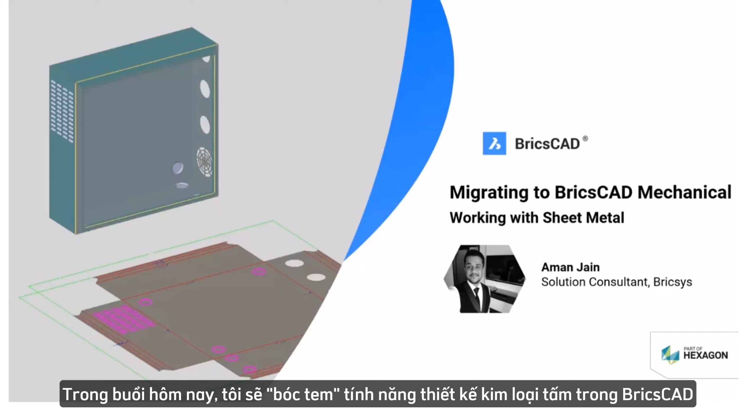In this session, we will unveil sheet metal design in BricsCAD and how we can easily migrate to BricsCAD Mechanical from a traditional 3D MCAD tool. From concept to fabrication, we will also try to discover BricsCAD's tools and the workflows that could essentially speed up your entire sheet metal design tasks. So sit back, relax, and enjoy this deep dive session with me on BricsCAD.

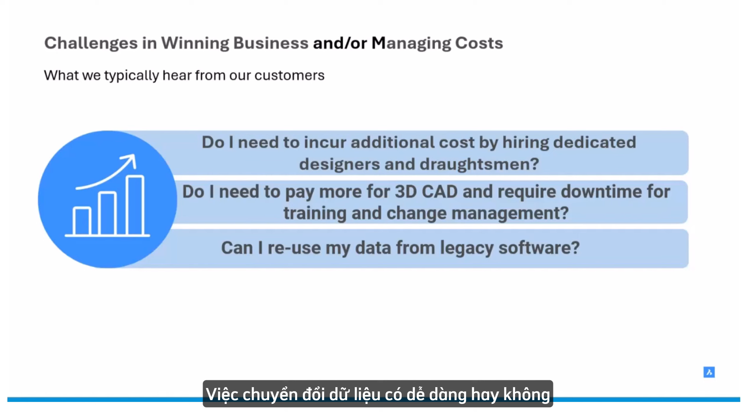Both of these processes require a company to invest in terms of both time and cost, which at times could be a costlier affair if the implementation does not go the way it was intended to. This transition period could also lead to temporary productivity losses as the workforce adapts to new tools and processes. Another concern that bothers most of them is the compatibility between their existing CAD and the new tool sets that they are trying to adopt. How easy it is to migrate is one of the questions that's asked by many of these organizations.

With BricsCAD offering everything in native DWG format, we aim to solve these challenges by providing industries a single platform for all their 2D and 3D workflows with a similar interface, all at an extremely robust cost. So yes, a software is capable enough to do a lot of things, but the real question is, do you really need it? A typical CAD workflow is what we see on the current slide.

We start with the component design. These components are then used to create assemblies, which is at the heart of any CAD workflow. The assembly may require you to model certain parts using surfaces or sheet metal. And once the sheet metal design and the assemblies are ready, we go to the production drawings. Presentation and animation, if not mandatory, remain an essential part for us to be able to create our design technical manuals and so on.

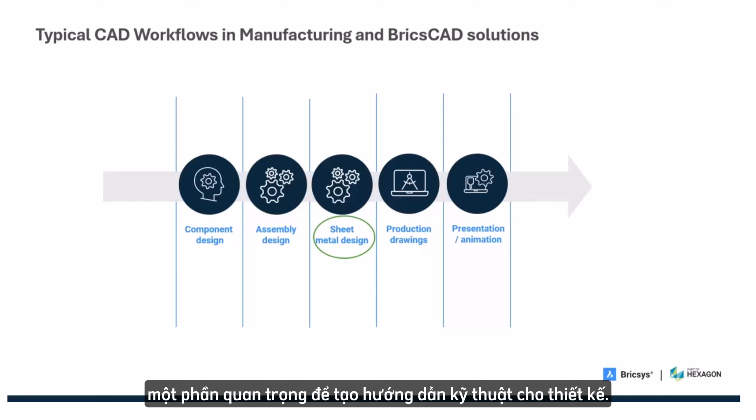Now, this entire workflow is very robustly supported by the BricsCAD Mechanical solution we have as an offering. And today in particular, we'll be looking at the sheet metal design module and how it helps users to improve, or rather collaborate or coexist with, their existing CAD solutions that they may be using.

This slide illustrates the computer-aided sheet metal fabrication workflow and highlights how BricsCAD is integrated within this workflow. The process is divided into several key phases, that is CAD for manufacturing, quoting, planning, programming, and production. BricsCAD plays a very vital role in the preparation and the production stages.

BricsCAD can be used to create and document the as-designed or the nominal geometry of the sheet metal parts. This involves creating detailed CAD models and ensuring that all components are correctly assembled according to the design specifications. Within BricsCAD, the bend and unfold operations are validated to ensure that the designed parts can be manufactured accordingly. This step is essential for confirming that the parts will behave as expected during the bending and the unfolding processes.

And then once the geometry is validated, it feeds into the quoting phase, where the validated geometry is used to calculate the cost, create quotations, negotiate price with the customers, and so on. The validated data from BricsCAD could also be critical for the planning phase, feeding into capacity planning, material planning, and scheduling. This ensures that the correct bill of materials and work are accounted for and that the project is scheduled effectively.

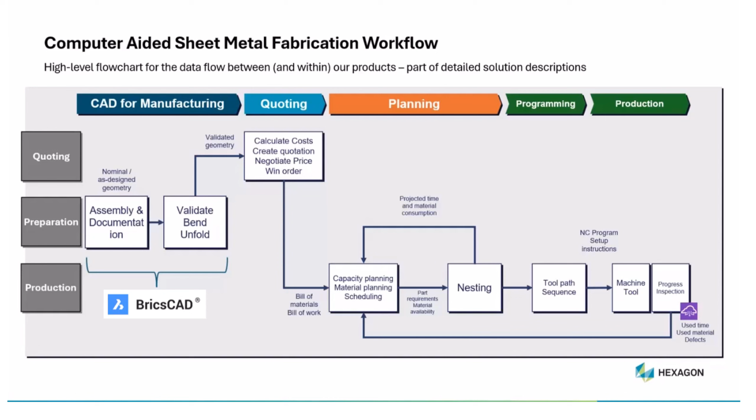Subsequently, this information can also be used for the nesting processes where parts are optimized for material usage. This feeds into the programming phase where the tool paths are sequenced for manufacturing. Finally, the production phase involves the machine tool execution of the NC programs generated earlier, with ongoing progress inspection. The feedback loop ensures that any such issues, defects, used time, and material are recorded and managed, optimizing the overall

manufacturing process. In summary, BricsCAD is quite integral at the early stages of the sheet metal fabrication workflow, particularly in preparing and validating the design geometry, which ensures accuracy and efficiency throughout the subsequent manufacturing stages.

The next slide showcases some of the key sheet metal modeling features that are available in the traditional 3D MCAD tools. So we start off with something called base flanges, which forms the base of the geometry of the entire sheet metal body that we are going to start with.

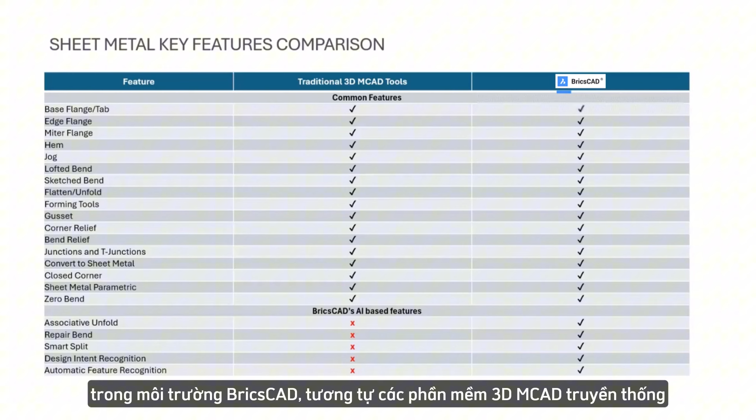Then comes the edge flanges, miter flanges, the reliefs that we have, the forming tools, flattening process, bends, junctions, T-junctions, converting an existing solid to a sheet metal body, sheet metal parametrics, and also some specific features such as closed corners and zero bends. With these features, a user can completely model their sheet metal bodies within the BricsCAD environment as compared against the traditional 3D MCAD tools.

So just to say, all these features that we see on the left-hand side are all available in the BricsCAD mechanical solution. And then, of course, since BricsCAD is known for its AI-based features, we do have AI-based features in the sheet metal module of the mechanical software.

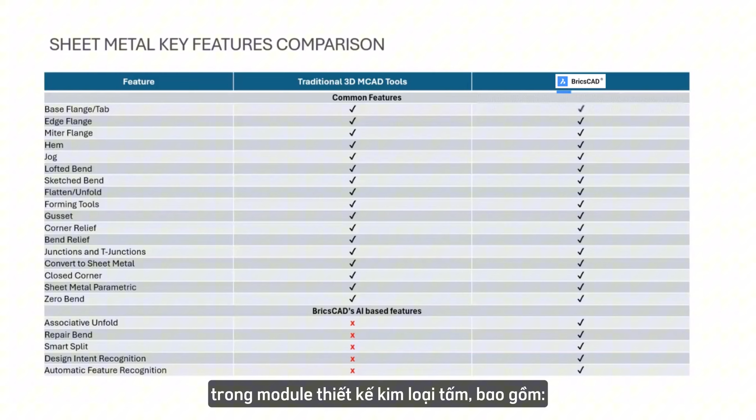There's something called associative unfolding, repair bends, smart split propagates, design intent recognition, and also automatic feature recognition, which are all available within BricsCAD. We'll have a look at some of these features in the demonstration that we'll be having after these slides.

So here we start with the demonstration now. And we'll start with BricsCAD V24, which is the latest version of the software. I'm using the ultimate version of the software, and hence I get access to all the modules present within BricsCAD. It's probably the only software in the world today that allows us to do BIM modeling as well as mechanical modeling within the same environment. Hence, integration and collaboration becomes very smooth.

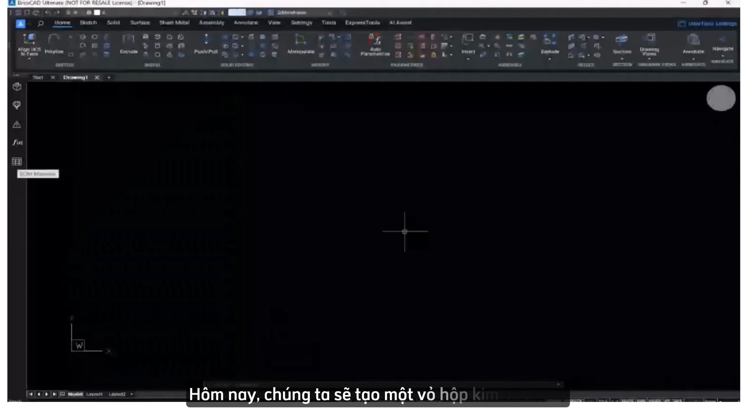Now with this, we start off with a new drawing. And today we'll be making a sheet metal enclosure. So for that, we'll have two processes that I'll show within the demonstration today. One is where we create the sheet metal from scratch within the BricsCAD environment. Another is where a sheet metal body would already be available to us, and how we can bring it inside BricsCAD to be able to convert it and use it further inside this environment.

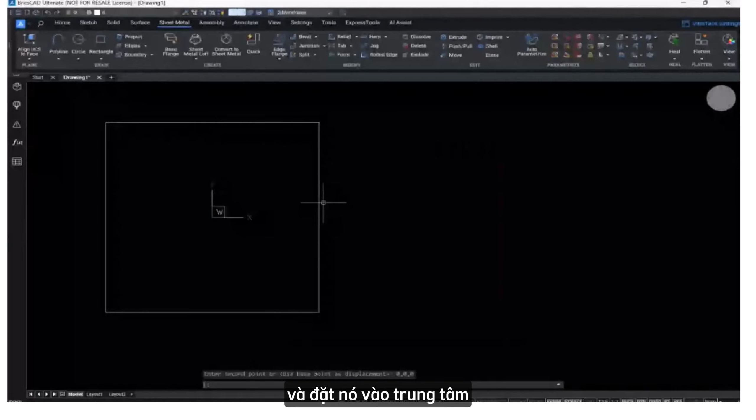So here I'm using the 2D drafting tools of BricsCAD, just creating a plain rectangle, or square rather, because it's 700 by 700 in dimensions. And I'm just trying to place it at the center. Since BricsCAD does not involve creation of plane geometries at all, it does not really matter on which plane we are trying to create our geometries from.

So the initial design intent, which we need to keep in mind for our traditional MCAD tools, is not something we need to do in BricsCAD. We can simply start with any of the planes that we'd want to work in. And as simple as this, we are able to create this base flange. So if you see, I just use the base flange command to create a flange out of the rectangle or the square that we had created.

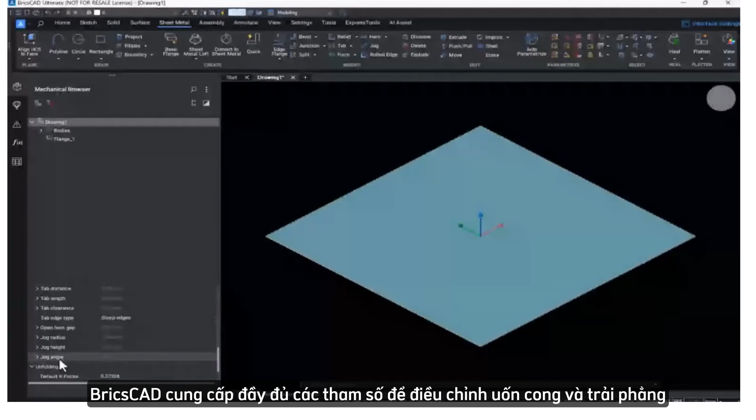And we have all those parameters that we can work with regarding folding and unfolding of the sheet metal body that we have in place, including K factors, bend reliefs, bend radiuses, and so on.

The next part would be creation of the edge flanges. And this time around, we'll select the edges in a very smart way. This is one of the smartest ways of selecting all the edges across instead of selecting them manually. And we'll select create edge flange from outside. There are two possibilities of creating an edge flange: one is from outside and one is within the flange itself, I mean, bending it internally, depending upon the type of bending process that we'll be following during our fabrication stage.

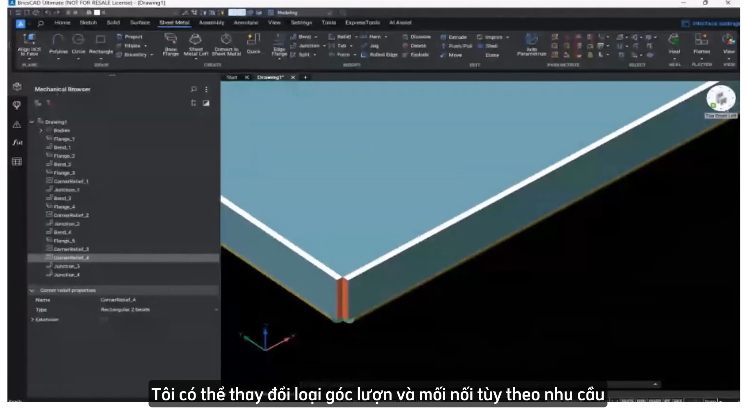And as you can see, within a fraction of a second, we were able to create these flanges, but also the corner reliefs and the junctions are automatically created as well. These corner reliefs we can change or modify depending upon the type of corner relief that we would want to use for our body. Of course, even in terms of the junctions, we can change the type of junctions, the junction mating that we'll have at the end of this modeling process.

So we'll try to create one more flange body. Now this is actually the door of the sheet metal enclosure that we are trying to model. And hence we'll be creating one more outside flange with a distance of 10 mm and 90-degree bend angle.

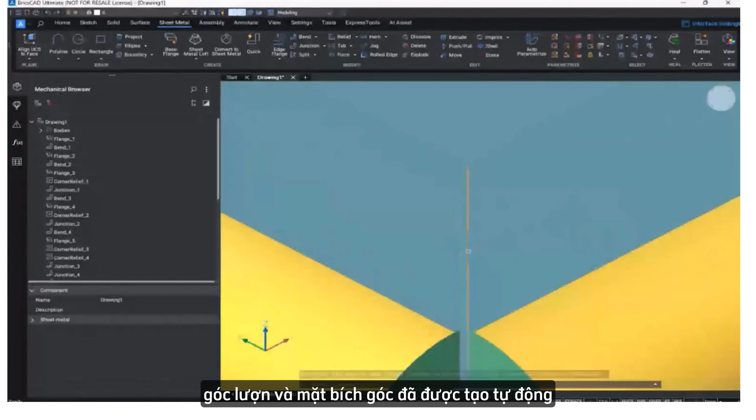Now with this, if we see in the left-hand side, the corner reliefs and the miter reliefs have automatically been created. At the same time, if I want to change the type of the bend relief that I'm getting over here, because essentially for a sheet metal enclosure, we need to make sure it's as packed as possible so as to avoid leakages of any kind.

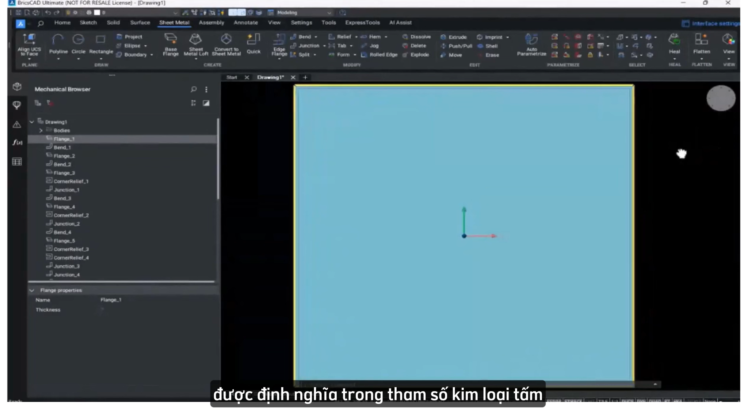So let's say if I select all these bend reliefs and from rectangle we make it smooth, we see the gaps have been closed to a minimalistic value. And of course, these values could be changed at a later stage as well. This is currently using the global value that had been defined along with the sheet metal parameters when we created the base. But this could be an absolute value, and we can change those values manually as well.

So the next part would be creation of vents and some keyholes for us to be able to place the switches. So since this will act like a control panel, we'll be having our red light switches as well as the green light switches and the lock for the door to open, as well as the vents for the air to circulate.

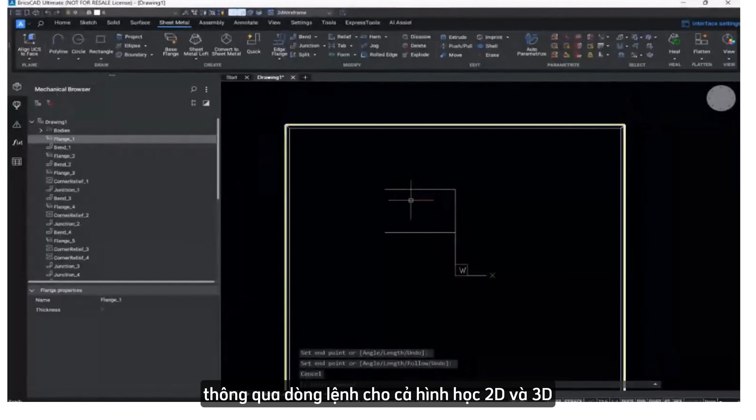Now, as you can see, the wonderful part about BricsCAD is it doesn't differentiate between the 2D environment and the 3D environment. I can use simple BricsCAD commands through a command line, even for my 2D geometries and the 3D geometries that I create. There's a 3D library and a 2D library that comes along with the installation. And here I'm taking a hole. This is actually a 3D parametric hole that's available within the library. And I'm just placing it, snapping it on the top of lines that I've just created.

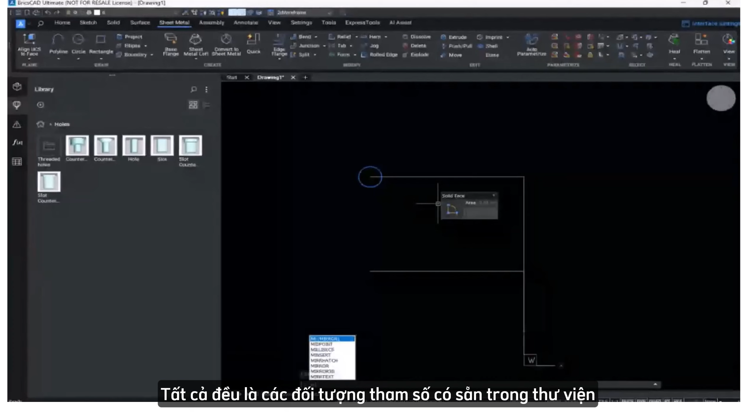And very simply, I can then mirror these, just change the diameter as per the diameter of the switches that I'm going to insert. As I said, these are all parametric features that are available within the libraries that you get. And of course, we can create our own custom libraries as well. We can simply add the components and have our own custom library created too. So here I'm just mirroring this particular hole that we have created.

And I'll just mirror those two holes as well. So we have about 4 switches. So we'll mirror this again based on the horizontal line that we have. So let us mirror the 2 holes that we have created. Select this one as well, and use the center line as a mirror line for us to be able to create this one.

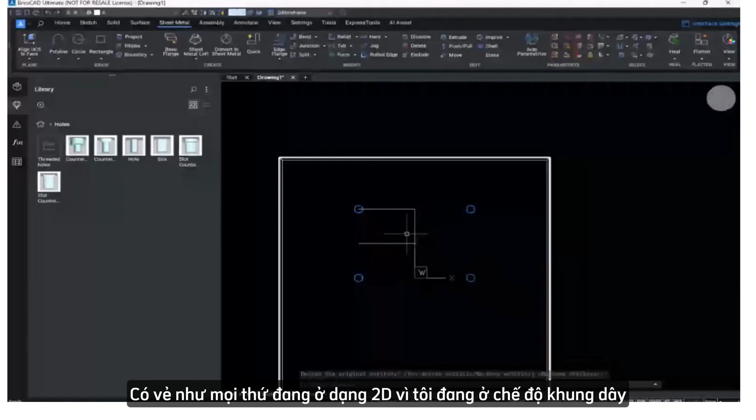Now you may feel that this is all in 2D because we are in the 2D wireframe representation, but this essentially is in 3D, and when we change the representation to a modeling perspective or any other perspective that shows us a 3D model, we'll actually be able to see that these are all actual holes, right? So here I'm going to add one more hole, which is for the lock, where the lock would be placed.

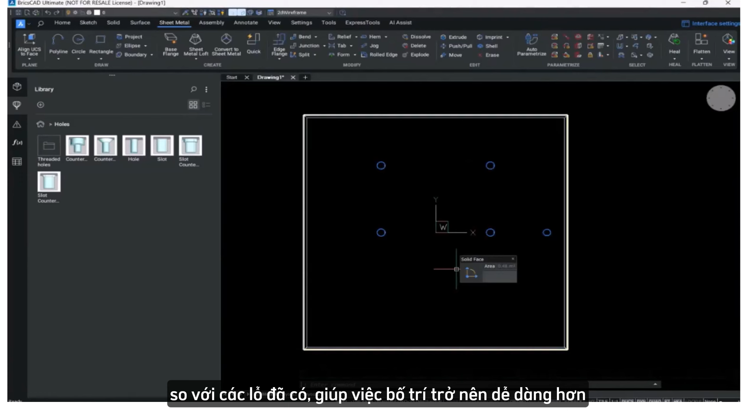Let's say this would be at a distance of around 140. Now, this is smart placement of the holes as well. So ideally, I'm able to place this in conjunction with the holes that I had already created, and I can add distances based on their positions. So this becomes easier for me rather than creating sketch geometries for each and every feature that we add, right?

Now, this is a slot. Not sure if you are able to see the slot representation because it's in red. So we'll rotate the slot by 90 degrees, and let's say from the horizontal flange it's at a distance of 100, and from this, it's at a distance of 50. And we'll then array it so that we get multiple instances of these slots. Now, these slots would act like vents for our enclosure.

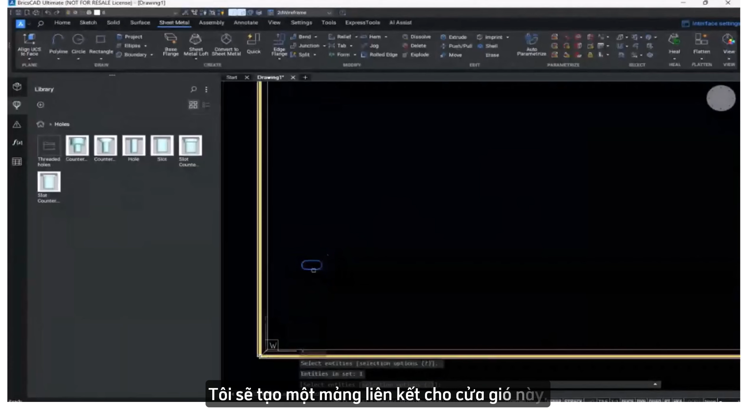That's the door. We just select this and have an associative array created for this particular slot that we have, right? Simply adding the numbers. So let's say for the columns, we have 20 numbers and the distance is 31.5. And then the rows, number of rows, we can increase to 4 or 5 depending upon the designs that you have in place. So for this one, I'm just increasing it to 4, keeping the distances between the slots the same. Just hit enter, and that's there.

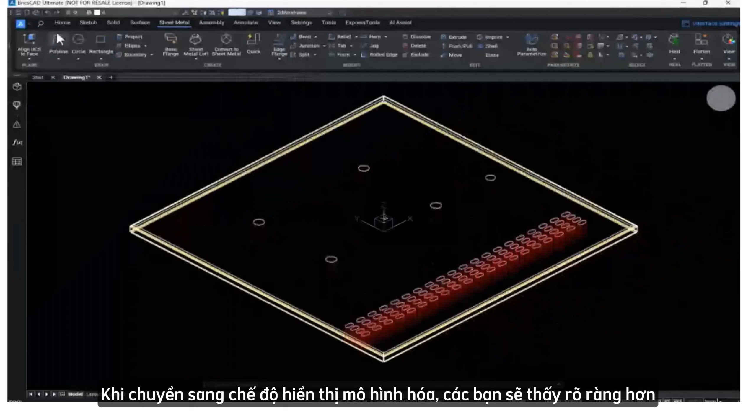So I have my holes placed, I have the slots placed as well. And when I switch the perspective to 3D, we see that these are actually hole representations and slot representations onto the sheet metal body. And when I switch off this layer, it's actually subtracted the material out of our base flange. BricsCAD is able to recognize these features as sheet metal features in general. And I just save this file before we move on to the next step.

So this, as I said, is the door DWG. Everything in BricsCAD is DWG, right? So that is kind of the USP of the solution offerings that we have. Let's say if I want to make it backwards compatible, share it with someone who's not using BricsCAD V24, I can do that. You cannot do that with any other traditional MCAD tool because they have their own proprietary extensions.

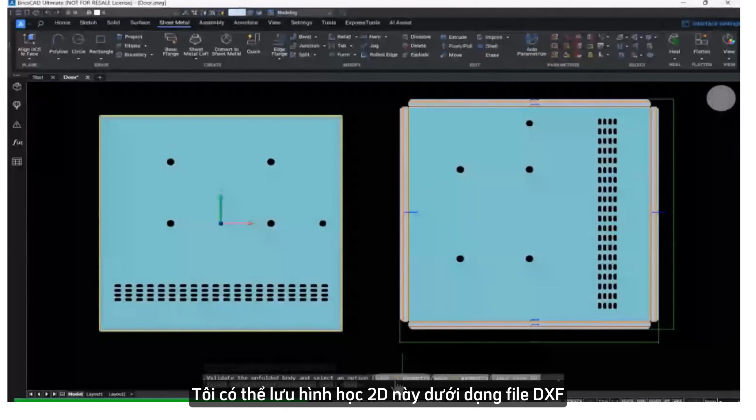So here's the unfolding pattern of the geometry that we created. And I can save this 2D geometry as a DXF file. So it's kind of a one-click DXF. As we looked in the process where we need an input from the CAD software to the machining software, this is the one that's most widely used. This can be used in most of the CAM softwares worldwide, and then the machining codes could be generated on top of this. As you can see, the bend lines, the representations, the reliefs have automatically been created for the DXFs. Let's save this.

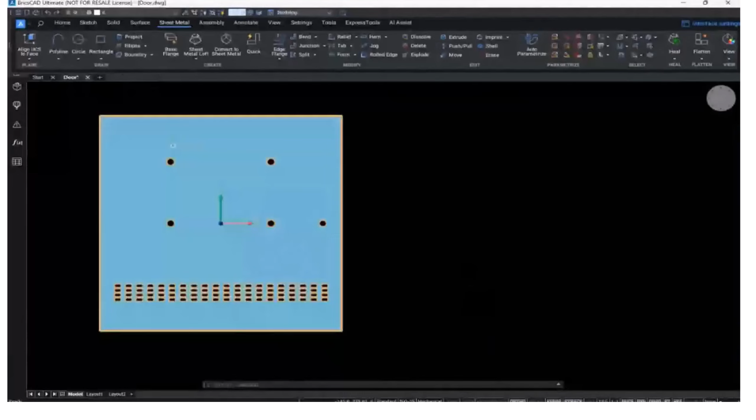All right. So this is part one of our modeling process, wherein we were able to create this entirely from scratch using BricsCAD's own functionalities. Now, part two involves importing a geometry that comes from another software altogether. It could be software already used in an industry, or a file that you receive from your customers or vendors as well. So first of all, let me save this drawing file with the name body. So this is the body of the enclosure. Let me just rename it.

And here we have an SLD-PRT file, which is essentially a SolidWorks part file that we are going to import inside BricsCAD. As you can see, I can import a lot of file formats, including CATIA, Creo, Inventor, NX, Solid Edge, SolidWorks, IGS, STEP, etc. So I'll be importing a SolidWorks part file, about a 2 MB file, whose source could be your customers, your vendors, or the existing design solutions that you'd be using in your organization.

So as I said, it can work coexistingly with your current software solutions. You don't have to replace everything, but you can use it simultaneously just to reduce the costs that you'd be incurring using those softwares full-fledgedly. So BricsCAD can do most of these things. And as you can see, once it's imported, it's a dumb body. It has its own component representation, but it acts like a dumb body, although it's a sheet metal body from SolidWorks.

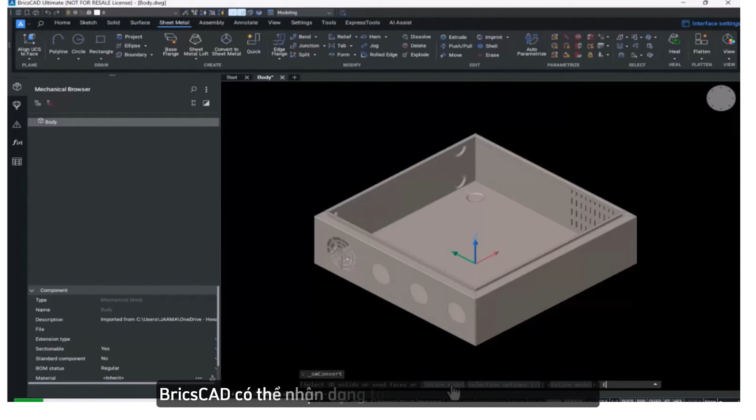With BricsCAD's convert to sheet metal functionality, we can convert it into a BricsCAD sheet metal body, and BricsCAD is able to recognize all of the sheet metal features in this particular body. It could be the flanges, the reliefs, the form features, the hole features that might have got inserted, etc. So now it's converted into a BricsCAD sheet metal body, and it's not just for the sake of it. We can do a lot more on this, apart from creating a drawing or just recognizing it as a BricsCAD sheet metal body. So what else can we do?

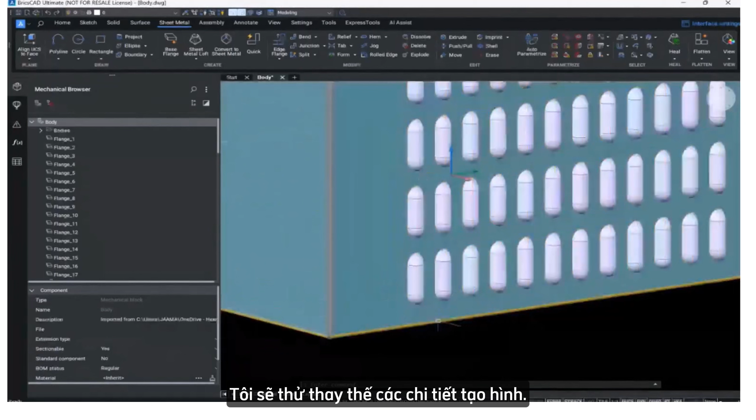So let us try and replace those form features. One might think that when it comes from another software, it might not be completely parametric, and of course that's true. So in case of these form features, let's say if we want to change the length of the louvers, all I need to do is simply replace the louvers that have come from SolidWorks. Very smartly, I can replace this.

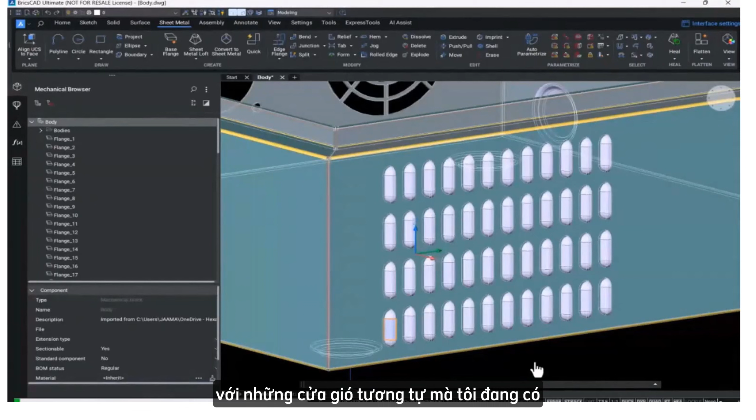All the louvers: BricsCAD is able to recognize all the similar form features. So it's another smart feature within the sheet metal environment, and it will replace all those louvers that you can see on the screen right now with the BricsCAD louvers that I have. So BricsCAD is able to create form features as well, as you can see.

But now I don't want to create something from scratch. I want to replace the existing form features with BricsCAD's form features, which I have been able to do. Now, the advantage of replacing the form features that came from SolidWorks with BricsCAD's form features is I get those form features as parametric form features.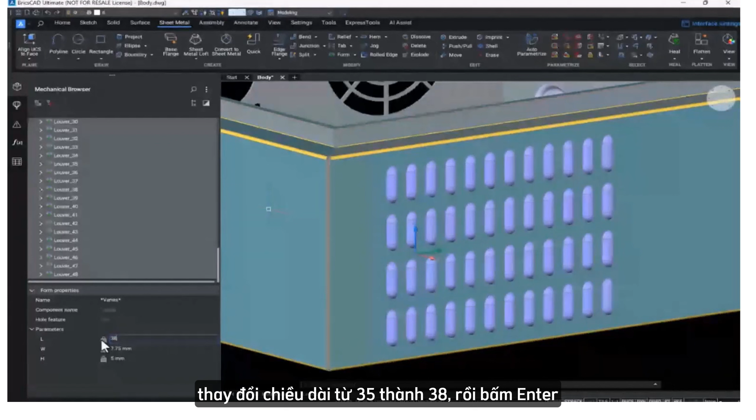Now, if I want to change the length of all the form features in one go, all I need to do is simply select all those 48 louvers, go to the parameters, and let's say I want to change the length from 35 to 38, okay, I hit enter. It will take some time for it to calculate and process, but if you just pay attention to the screen, you'll see a change in the length of these louvers, right?

It might just flash in a fraction of a second. So if you just pay attention to the screen, we'll see the change. Just wait for it to happen. Yeah, there it is, right? So that's how I'm able to replace the existing form features that could have come from any of the 3D modeling software.

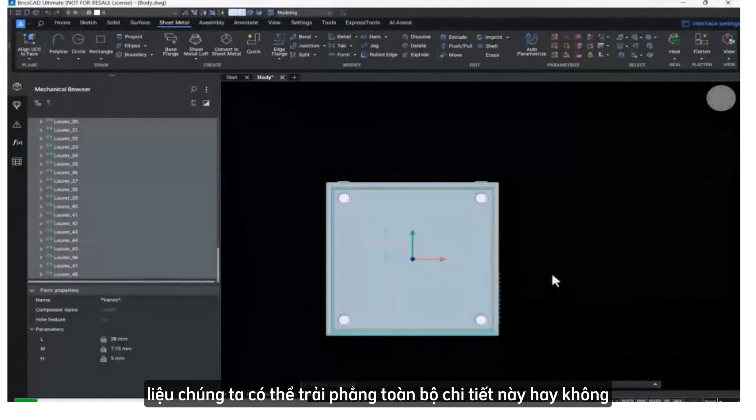And then finally, of course, the most important thing is whether we are able to unfold this entire body. Yes, we can do it. We can unfold this body completely. And the representations are as per design standards that are used in any of the companies. So even for the form features that you can see, those are very accurate representations that we get for the louvers and the other form features that are present, right?

And I can save this as a DXF like we did for the earlier geometry. And as we can see, we have the bend line annotations, the angle of the bend, the radius of the bend, the form features in place. Of course, there'd be a need to manually dimension it a bit, but then we get the exterior dimensions. So we come to know what length of the material, what area of the material we'd need to create this kind of geometry, right?

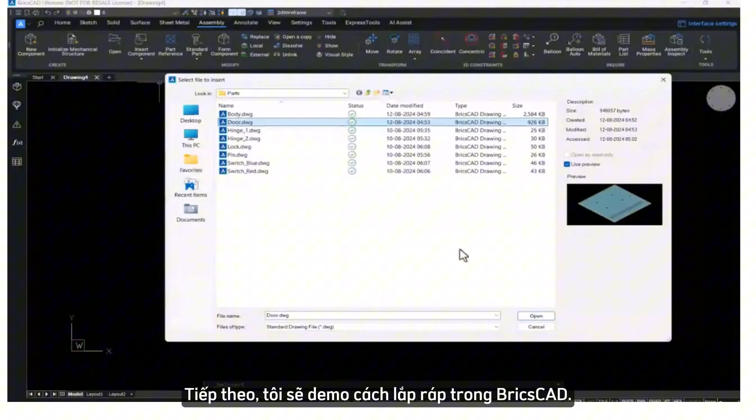So that is something that we have in place with BricsCAD. The exterior dimensions are there in place already. So this finishes our body part, wherein we saw how we can leverage BricsCAD's interoperability with other software to be able to recognize it as a sheet metal body and then use it further. Okay, so that completes the modeling part, and now we'll see how we can assemble inside BricsCAD.

Okay, so assembly is extremely simple. With the type of constraints that we have, it's something that every user who has come from an engineering background would be able to understand. It's as simple as that. So all I'm doing is inserting the door. It's not an import, I'm sorry. It's inserting the component and I'm creating an assembly. So we'll insert this door which we previously created. And I just changed the representation to modeling.

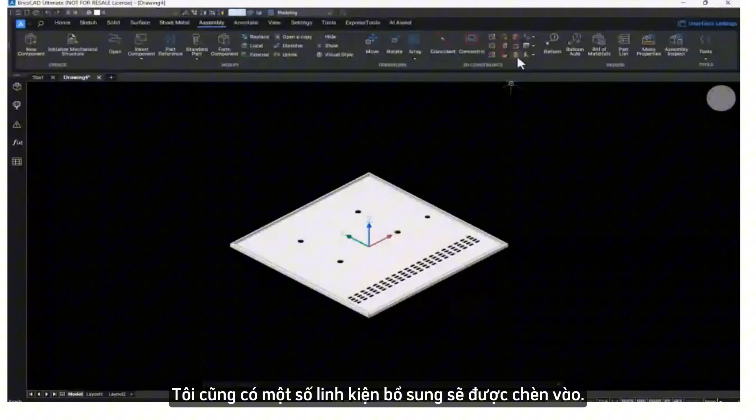Okay, and then I have some additional components in place which I'll insert. In BricsCAD, since it does not differentiate between a part and an assembly through an extension, they are all DWGs. I can simply insert a component using the BMINSERT command, and this is the one that I want to insert. So these hinges would essentially be on the door, and then we have a separate hinge for the body as well, which will mate together to create our complete enclosure body. Right. So we add two instances of it.

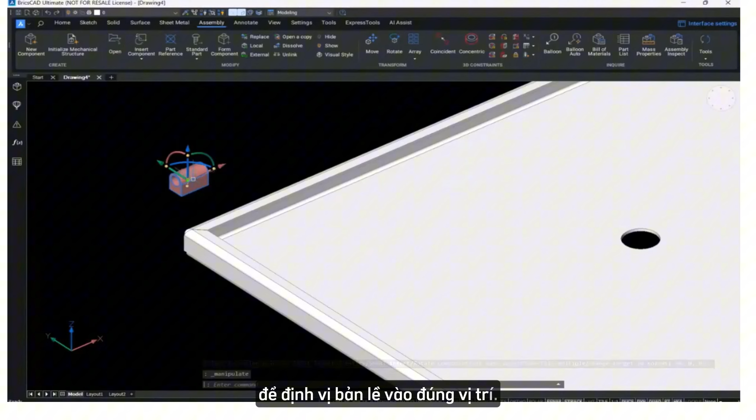There are two hinges. And we'll see how we can use BricsCAD's 3D constraints to position it in its actual place, right? So we need to be able to constrain it on the side of the door. First of all, we'll make it constraint ready so that it becomes easier for the software to move or rotate the body when we apply constraints. So I'm selecting this face and I'm using a coincident constraint, which will make these planes coincident with one another.

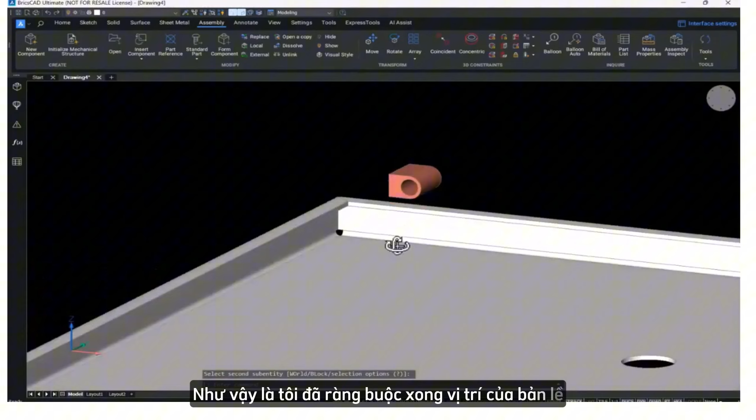I can use the same constraint once again for the top face of the hinge and the bottom face of the door body where this hinge is going to be placed. So that constrains it completely in terms of the position that I want to place my hinge in. So I can just move it across, and now it's freely movable across the y-axis.

And what I can do is now give it a distance constraint from the outside side of the door to the flange or to the hinge at a distance of 200, or 201, because we need some clearance when it'll get mated with the hinges present on the body. So I'll just make this also constraint ready, just rotating it with the help of the manipulator.

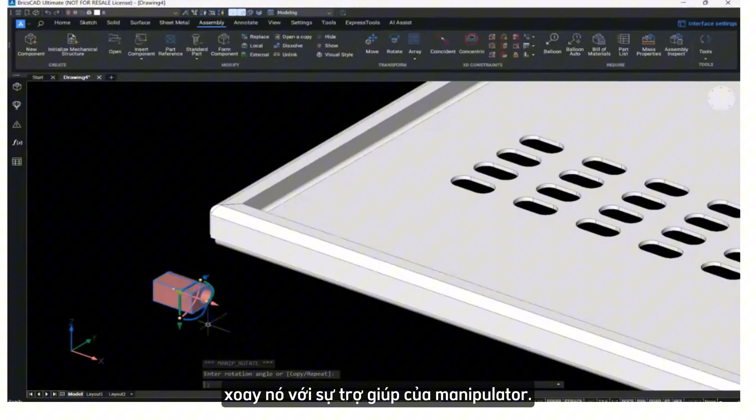The gizmo that you see on the screen right now, which I'm using to rotate the components, is called the manipulator in BricsCAD, which helps us easily maneuver the components by translating them, rotating them, or even creating copies. So it's a really handy tool, and I need not use any commands as such to carry out those operations. I can use it for 2D entities and for 3D entities as well.

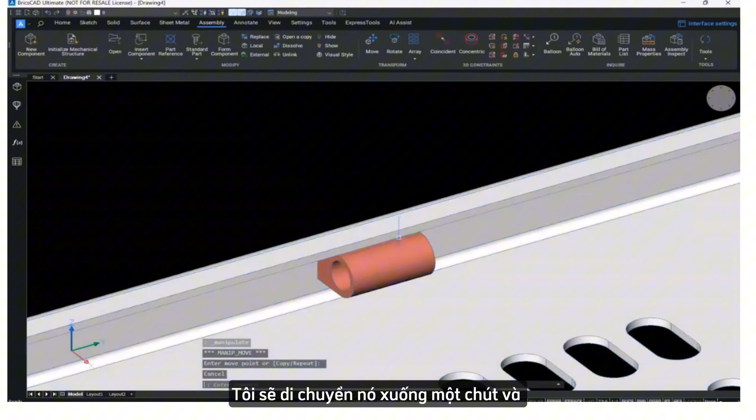So I'll just constrain it once again. It's the same type of constraints that I've given for this particular body as well. I just translate it a bit further down and then apply the distance constraint at a distance of 201. All right. Now with this, we have completed the placement of the hinges.

And then we'll try to add more components, like I was mentioning earlier, the switches for our door and also the lock. So again, we'll use the insert component, or you can even type in BMINSERT on the command line, which executes the same command. You can go in from the ribbon or use the command line depending upon the comfort level of the user.

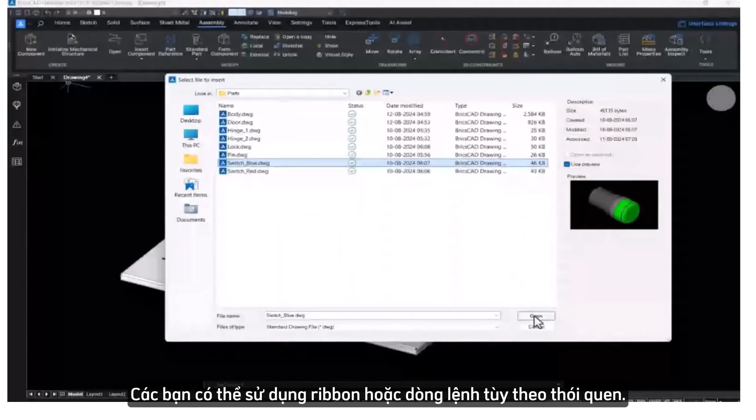It really becomes handy for someone who's coming from a CAD background, who's very used to and very comfortable using the command line rather than the ribbons. So it's really handy for them to be able to execute the commands that they want through the command line, even for the 3D operations that they do.

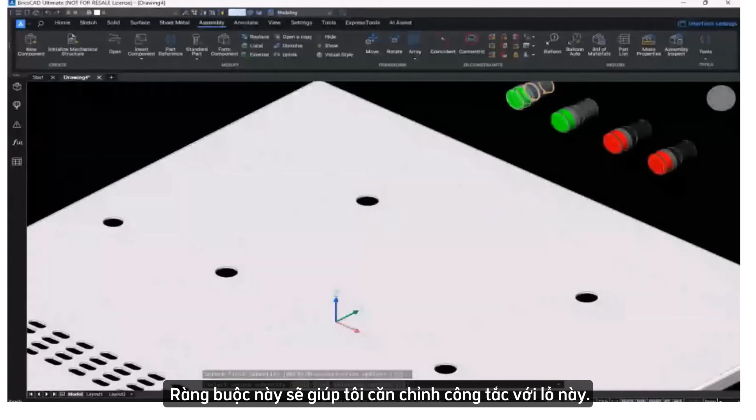So I'm inserting 4 instances. You can simply copy as well using the gizmo, or just do a copy paste. That should work. But that's the process that I'm comfortable with through insert component. So this particular constraint would help us align the switches to this particular hole. So we have this concentric constraint, and it's got aligned, as you can see.

And I'll apply a coincident constraint to fix the geometry on top of the surface that I have. Now I'll just select the top surface so that it's coincident on the top surface, and I'm able to place my switch. Similarly, I'll apply the same set of constraints to the other geometries.

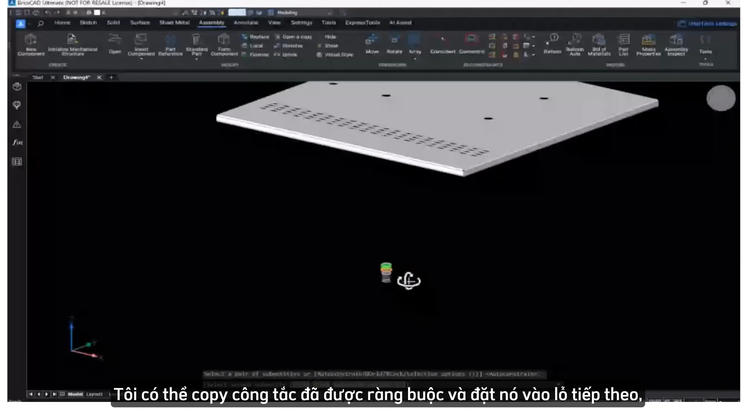One thing that I can do is copy the same switch that I had constrained earlier, and place it onto the next hole representation. That would have done things for me. But this is how I can make sure that the constraints that I've applied are perfect. And in case I want to change the constraints in the near future, or if the whole geometry shifts, the switches need to shift as well.

So if there's a change in the design principles, let's say the hole has to shift by another 10 mm or so, all I need to do is shift the hole by another 10 mm and the entire geometry would update automatically. So instead of copying it at that particular place, constraining the geometry is really handy.

And as you can see, it's really very simple to apply constraints: coincident, concentric, distance, and there are other constraints as well, which help us complete our assembly modeling. The last part for this one would be the lock.

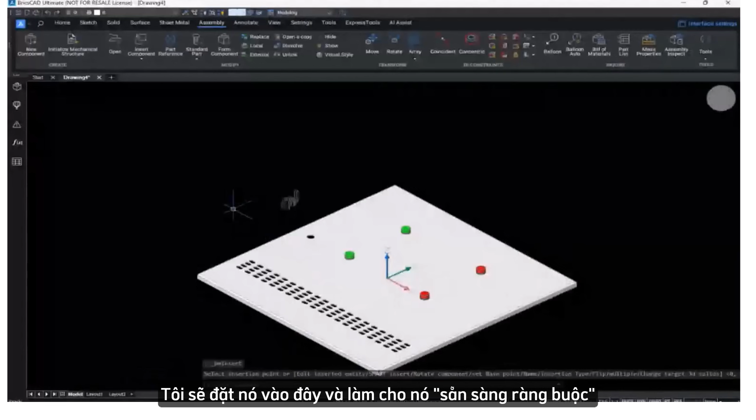I'll just place it over here, make it, let's say, constraint ready. Probably just rotate it, or I can directly apply the constraints as well. So just concentric for this one and for this one. Right, and there's this. Okay, now it's got a bit inverted. So I can just shift it upwards. We need the handle to be there on the outside.

So let me see if I can use the gizmo to rotate it. So that would be this particular axis of rotation. Oh no. Since I've constrained it, now I'll not be able to rotate it. But what I can do is, the concentric constraint that I've applied, in case I want to change the directions, right now they are same. I can simply say opposite and it just inverts itself.

So instead of rotating it manually, since I already applied the constraints, rather than deleting them, I can simply change the directions in which the constraints have been applied, right? So this helps me create the door lock, and that kind of completes my entire assembly of the door. Again, this is not the complete assembly or the main assembly. This is just the sub-assembly that would get inserted in another main assembly, right?

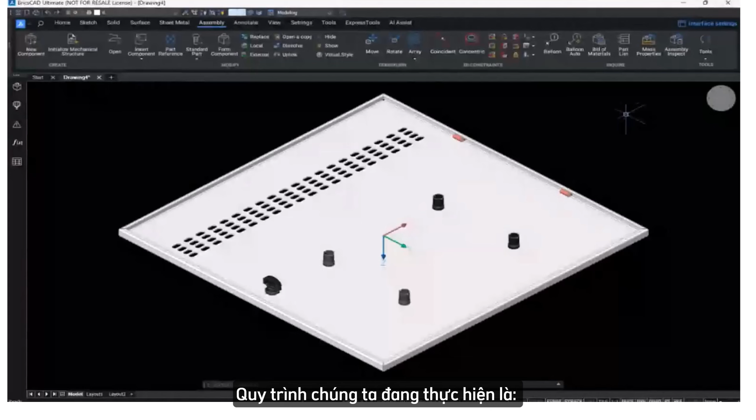So this is the process that we are following. We had the parts created, we brought in parts from another software, then we inserted components, we have the sub-assembly, and then we'll use this entire sub-assembly to create the main assembly. So we'll store it in the sub-assembly folder. Let's name it something like door sub-assembly, which would help us recognize that this is a sub-assembly including multiple components within it. Let's close this.

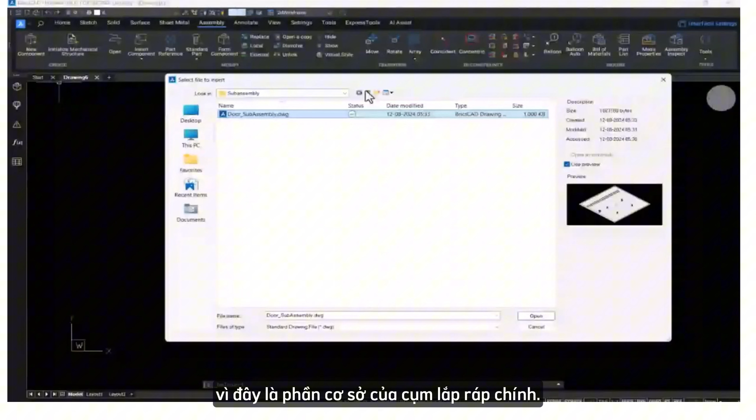Okay, so a new drawing once again. Now this would be the final assembly. We'll insert the component, the body first, because that forms the base for our main assembly. The door would be placed on top of this. So let's place our body and fix it so that it does not move and acts as a rigid constraint, so the body does not move as we apply constraints on the other parts after inserting the components. So let us constrain this fixed and insert.

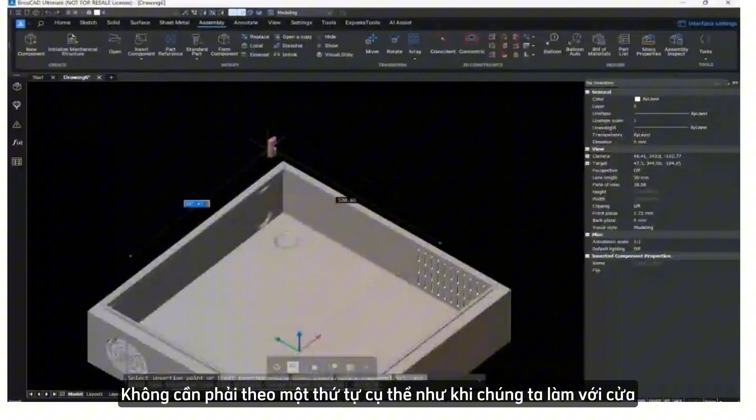So this is the main assembly, and inside the main assembly as well, we can insert components. So it need not be in a particular order like we saw with the door, that we need to create the sub-assembly first, and only then we'll be able to create the final assembly. It's not like that. These components, when we insert them, are specific to this particular file. So any change across these hinges would be reflected in the main assembly file. That is how it works.

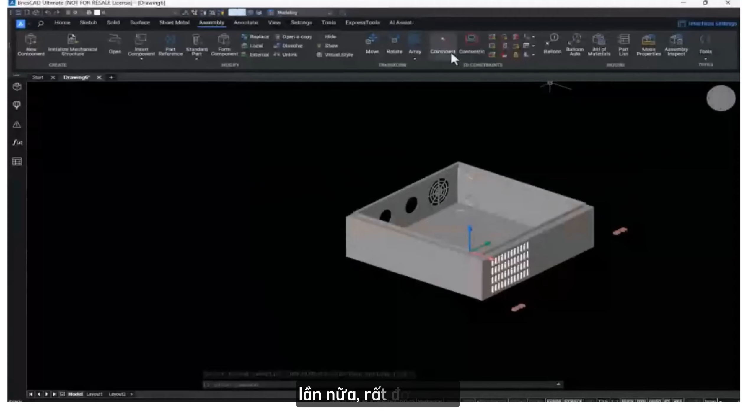Any change in the hinge 2 that we had in the door would be reflected in the sub-assembly as well as the main assembly. So it's cascading down. If there's a change in the child file, all the parent files would accommodate those changes. So here we are applying constraints to these hinges. Very plain and simple, just applying coincident constraints so that it stays in place. And once I've applied the coincident constraint, all I need to do is give them the distance constraint from the faces. I'll apply the same thing over here as well.

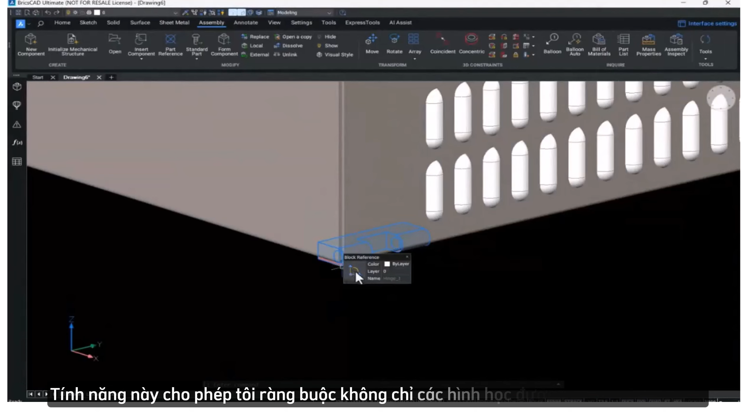First, coincident constraint to this face. And as you can see, this is a geometry from, again, I'm reiterating this because this is the interoperability feature of BricsCAD. Sorry, just selected the wrong component. Select it once again. So this is the interoperability feature of BricsCAD, wherein I'm not just able to constrain geometries modeled inside BricsCAD. I'm also able to constrain geometries modeled outside of the software environment. So here I'm able to constrain this.

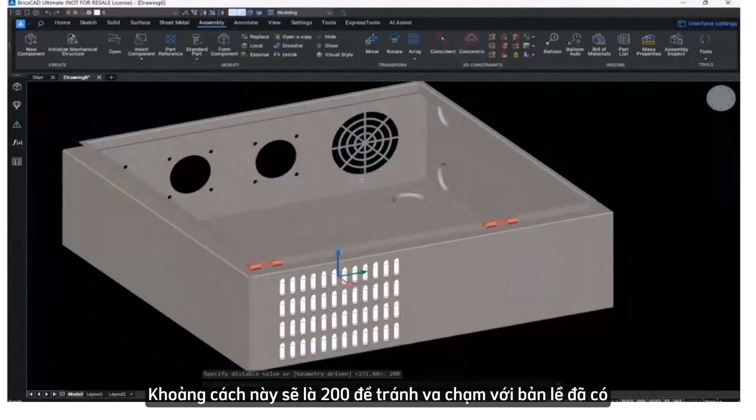And then all I need to do is give the design distance constraint so that it stays in place. This would be in reference to the constraints that we had placed for the hinge in the door. The hinges would be placed in between. That's the male-female joint. So this would be at a distance of 200 so that it doesn't interfere with the hinges we have in place at the door. And this again would be at a distance of 200 from this particular face.

Let me just move it a bit on the right hand side. This is a free movement. The gizmo, or the manipulator, helps us determine which degrees of freedom are free and which are locked. Essentially, if it rotates or translates in one particular axis, then we know these are the free degrees of freedom for that component. That is how we can check the free degrees of freedom, and if needed, they can be constrained at a later stage using the constraints.

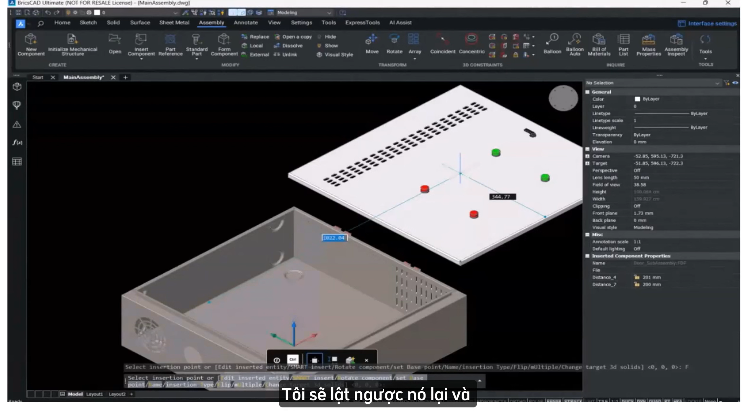So let me insert the door geometry, the subassembly that we have created. So while inserting, as I said, we can make it assembly ready or constraint ready. So I'll just flip this entire thing top to bottom, right? And also rotate this so that the door is placed correctly. By 180 degrees is what I'm trying to rotate this. Now I have the accurate representation of the door geometry, and the hinges are linearly placed as well, right?

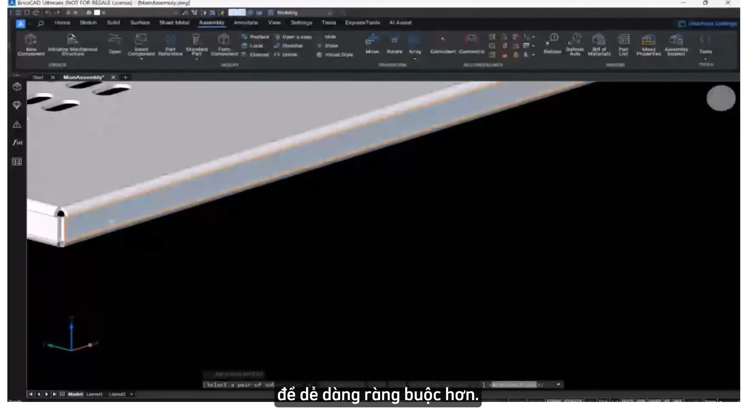So for me, now it really becomes easy to apply the constraints. Had it been placed vice versa or in the opposite direction, it could have still worked, but then it's a bit of a difficult thing for the software as well to understand how the geometry needs to rotate or what the design intent is. So it's better we keep it constraint ready so that it helps us to constrain it very easily. So it's just two constraints that I've applied, and my entire geometry is now constrained.

So this completes the assembly, wherein we have seen a lot of things. Now we'd also see what kind of degrees of freedom are open, right? So for this door, they should be able to open or rotate, right? As you can see now, when I'm opening this door, the body also translates onto a different axis. So we'll fix the body, right? Because it's translating in the x-axis, we'll fix one of or both of these faces once again.

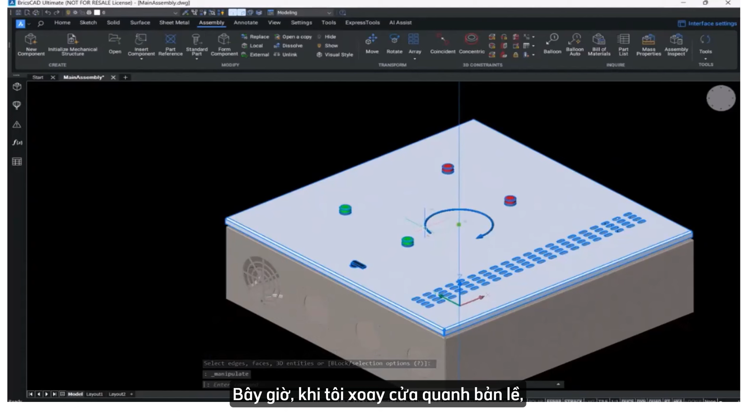So that now when I'm trying to rotate the door across the hinges, across this particular axis, okay, now it's steady. So now I can see the body does not translate when I'm trying to rotate the door, and it's perfectly mated. So this now completes our assembly. Also, if I show you the 2D representation, the way the hinges have been placed, these are all perfect because we had our design intent in mind and the positions that we wanted to have for those particular hinges, right?

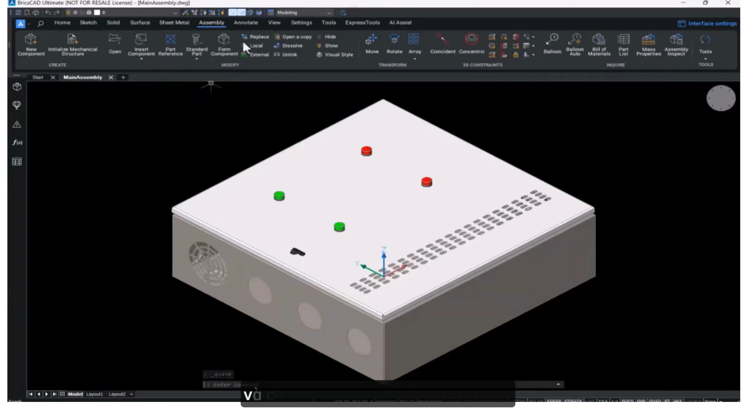And then last but not the least, of course, comes the annotation part. So let me just save this first. And we'll go to annotate to create accurate 2D representations of the assembly that we have. So let me just delete this viewport. And the best thing about BricsCAD is, if you can see, this entire thing looks as if I'm working in an AutoCAD environment.

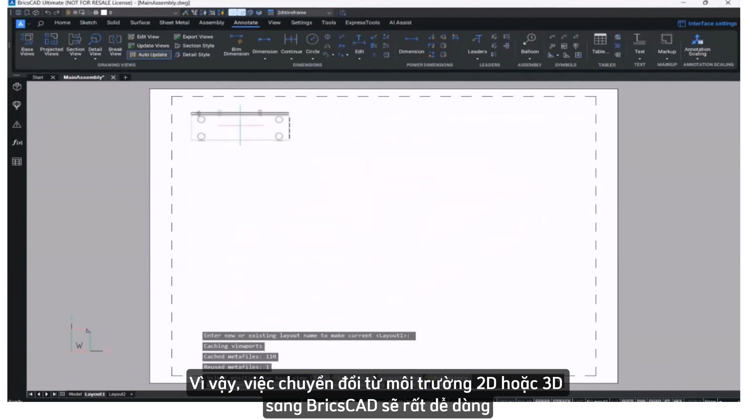And 99% of the users that would be working in 3D or 2D CAD environments are well known to this particular interface, right? They need no introduction to this interface, and hence it really becomes easy for them to adapt. If they're coming from a 2D environment or a 3D environment, doesn't really matter because everyone knows what this environment is. So we have the model layout space wherein we used the base view feature of BricsCAD for creating these accurate representations of drawings, and these drawings are all associative.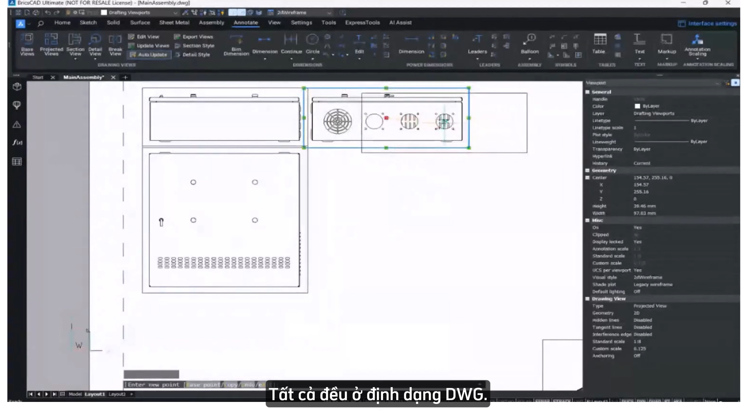So we have had a lot of seminars or webinars in the past wherein we have explained this particular feature of BricsCAD, where you change the 3D model and the entire 2D drawings get updated. So any change in the 3D model whatsoever would update the 2D drawing representations inside BricsCAD. Okay, and again, these are all in DWG, right? The 2D representations that we have created are in DWG. The 3D models that we have created are in DWG. How does that help? The transition from 3D to 2D or even from 2D to 3D is seamless, right?

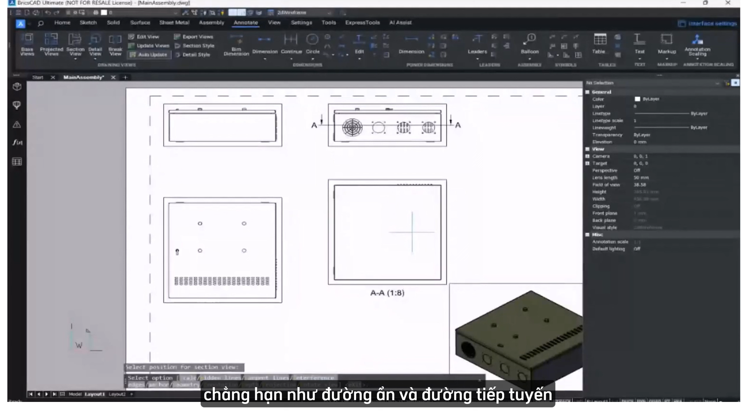So let's say if I want to annotate, or rather, let's create sections first. So I'm creating a section on the side view placement, a horizontal section as well as a vertical section, and we'll see how the section behaves, right? We can enable a lot of other geometries as well, how the hidden lines are going to be visible, how the tangent lines are going to be visible. So the user has all the control over all these parameters from a properties panel.

We can even change the type of views or projections that we need to use, if it's a third angle projection or the first angle projection that we need to use inside our drawing. So let me just make this in line with the view that I've placed.

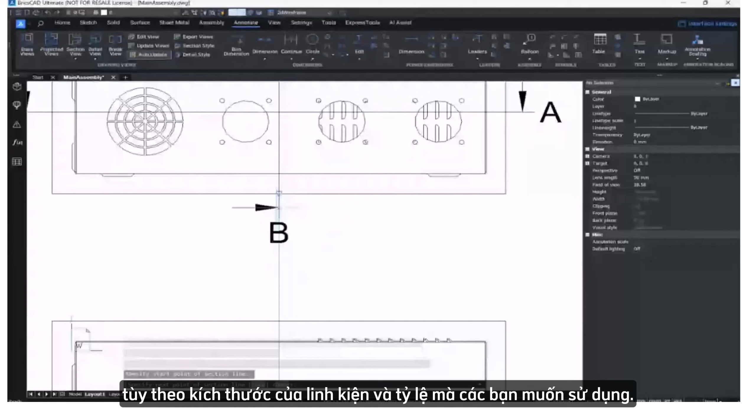Okay, and in case I want a bigger paper size, all I need to do is go to page setup and choose a different paper size which is larger than this. Okay, so that is something that I can do. I did it initially from A4 to A3, but you can do it from A3 to A2 or A0 or A1, depending upon the type of components or the sizes that you'd be working on, and also the scales that you'd be working on. So this could be easily scaled down or scaled up, or I can even use the true scale if needed, depending on what kind of plots you use for your companies and standards.

This is the section view, a full section view. I can have a half section view or a section view at a certain depth, right? As you can see on the right-hand side in the properties, when I do the section, it does ask me for the depth of the section as well. And I can easily manage the depth in case I do not want a full depth section; if I want it at a certain depth, I can do that as well, right?

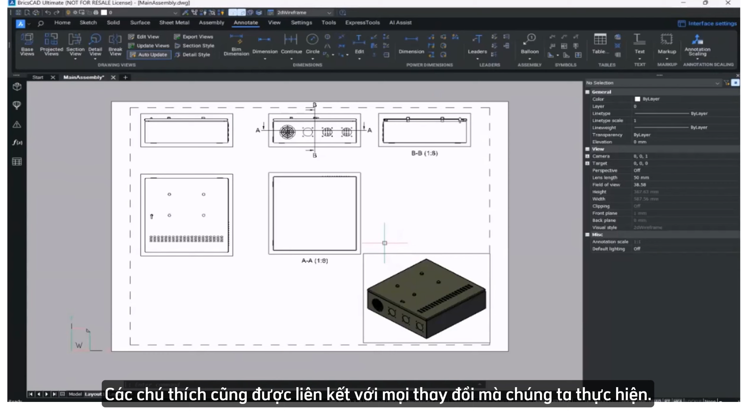Now, of course, the annotations, again, are associated with whatever changes we make. We can also create the BOM, the bill of material. So this is the advanced bill of material manager within BricsCAD. We can very easily manage the entire bill of material. For now, I'll just be showcasing how easily we can place it, and again it is able to detect the body that was created in another environment.

It's been able to detect the hinges that we placed, the locks that we have in place, the switches that we have in place, and the rest of the other properties, if needed, can be added as well in another column through the advanced bill of material manager in BricsCAD.

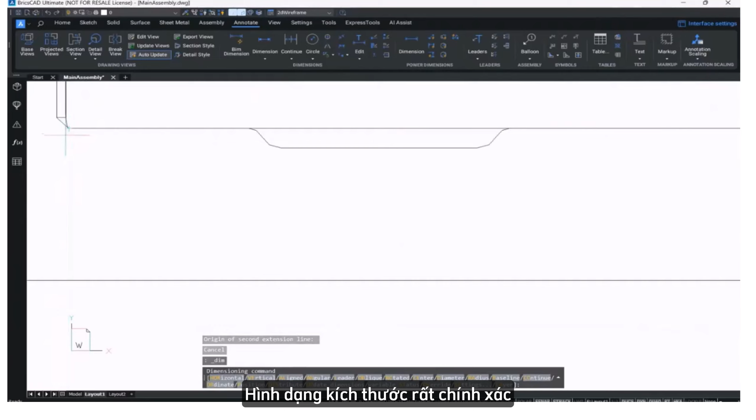Right. Last but not least come the dimensions. So let's say we need to add dimensions, we can simply use the annotations in BricsCAD, a very accurate dimension representation. And the best part is if we dimension this over here in layouts. What I have personally seen happening is we annotate the entire thing in a 3D MCAD tool, and when we bring it inside a CAD environment, let's say AutoCAD or even BricsCAD for that matter, when it comes from a traditional 3D CAD environment, it loses all its intelligence, right?

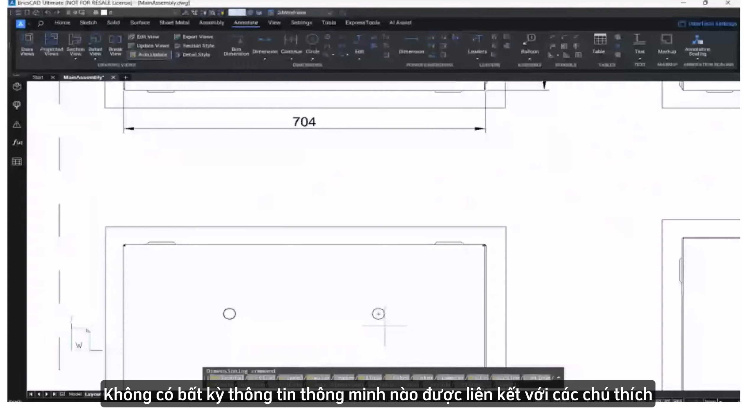The dimensions act like lines, arrows, and text. It all comes exploded. Okay, there is no intelligence whatsoever associated with the annotations that we place inside a 3D modeling environment when it comes to the 2D environment, right?

But with BricsCAD, since it's all in DWG, let's say I just want to share this 2D DWG with my vendor or the production team, all I need to do is export this as a DWG. Okay, I can go to my layout and then simply right-click and export it as DWG. Let me export this. Export to DWG is the standard file format that we can export our layouts in. Create a new folder, and just save this.

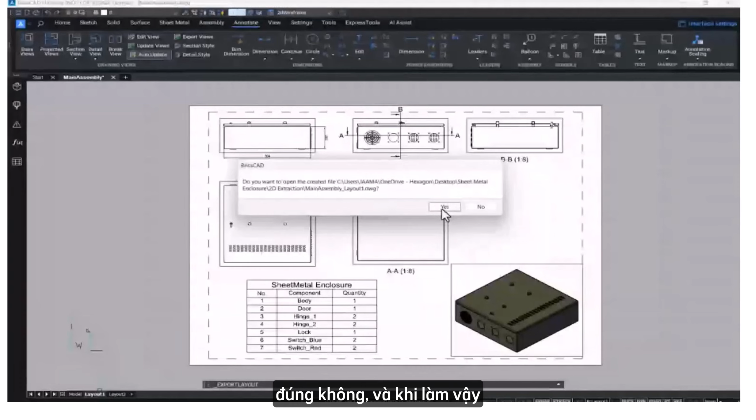Right, and once we do this, we can simply open it and see that the intelligence is still there. A table remains a table, a dimension remains a dimension, right? All the layers have been brought in as well. So let's say I want to dimension or redimension it, it still has the intelligence within the drawings even after we export it to a 2D CAD environment. If we want to change the layer color of the hatches that we have in place, you can simply do that as well, very easily.

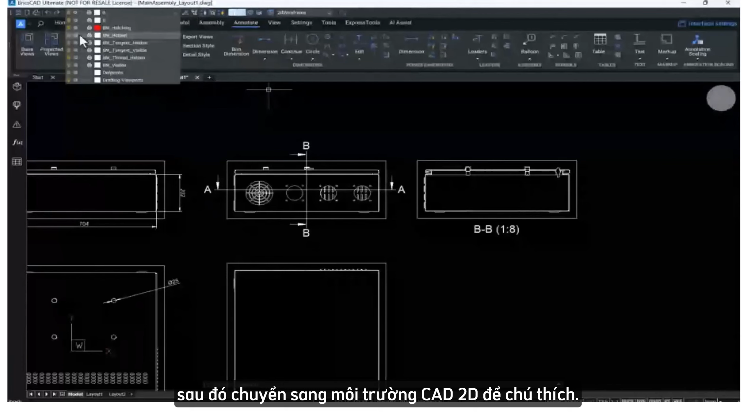So when it comes to the beautification part, or rather the annotation part, right, the general workflow is you create the entire model in a 3D environment and then shift it to a 2D CAD environment for the user to be able to do a quick annotation on top of it. Since it does lose a lot of intelligence, BricsCAD makes sense, because it does not lose any sort of intelligence or associativity on these entities, right? And then it can be very easily managed once it comes to the 2D environment as well.

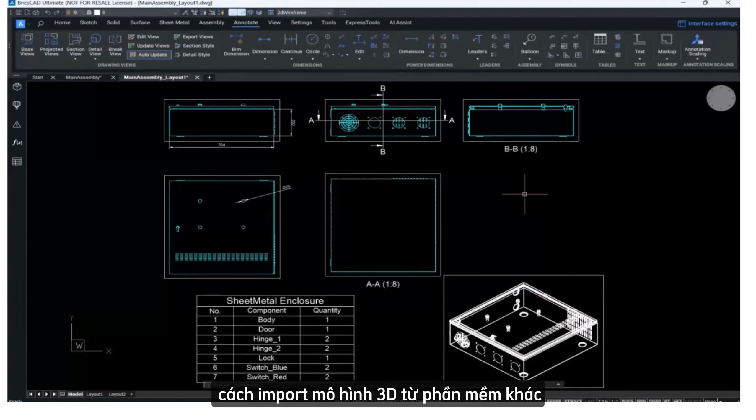So this covers the entire demonstration of what we can do with sheet metal in BricsCAD. Of course, we covered a lot of topics, including how we can start from scratch, how we can import a 3D model from a different environment, convert it back into sheet metal, recognize the features, replace some of the form features to make it parametric, create design views, create unfolding views, and then finally create an assembly to complete our modeling, and then the drafting, which is associated with the models that we have in place. Right?

So that was the demonstration I had to do to showcase the sheet metal capabilities of BricsCAD. More or less, whatever you can do in your current 3D CAD environment can be done through BricsCAD, or it can work in conjunction with your current existing workflows that you have in place.

So this is where we become quite a cost-saving solution offering in the market, because of the licensing options that we have in place. We have three types of licensing policies: single, volume, or network, depending upon your requirements. Again, these licenses are all perpetual in nature.

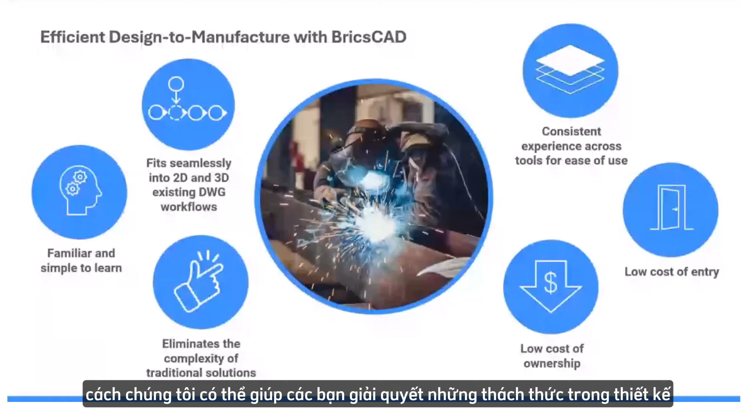How we are different and what we can do to help you out with your design challenges is something that I wanted to outline. So firstly is the accessibility aspect. As I was mentioning, the entire design technology that can really offer manufacturers improvements in terms of efficiency, flexibility, and innovation is costly, complex, and provides much more than is realistically needed.

So all your 3D environments may be really, really efficient in terms of giving you all sets of features. But the question is, do you require all those features, right? Do you all use all those features? And then, does it make sense paying for the features that you don't need or might not use?

Okay. So technically, the next question could be, does BricsCAD solve your requirements? And if yes, what's stopping you from moving towards the offerings that we have? Because traditionally, if something meets your requirements, then there should not be any hesitation whatsoever in moving towards a software that can save a lot of costs for your organization, right? So again, low cost of ownership, low cost of entry.

Again, in terms of the trainings that you need to enable your users, or the downtime that you need for your traditional 2D CAD users to shift to 3D, or even for your existing 3D users to shift to a new environment, it's really less. You can simply go ahead with a day's training or a day's overview of BricsCAD, and it's as easy as it goes. You can simply start modeling with the software.

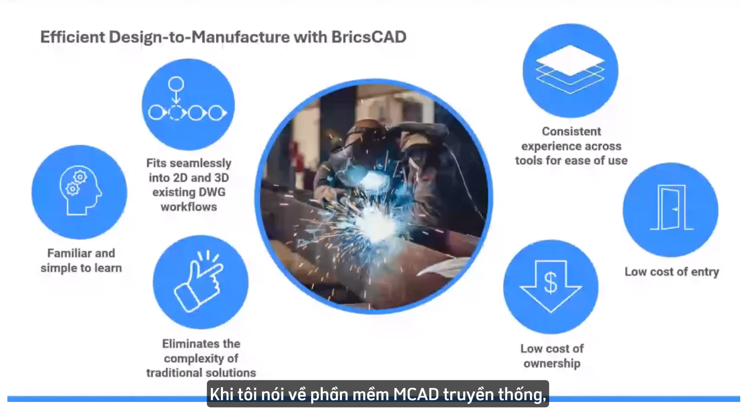Plus the additional benefits that come along with having everything in DWG, right? That is something that we saw, wherein we can make the models backwards compatible, which is not quite the case with a traditional MCAD tool. When I speak about a traditional MCAD tool, it could be something like SolidWorks or Inventor or PTC Creo or anything else for that matter, which do not allow any sort of backwards compatibility whatsoever.

In terms of learning, yes, it's fairly simple to learn, because anyone who knows AutoCAD or 2D CAD can really get accustomed to BricsCAD, even its 3D modeling capabilities.